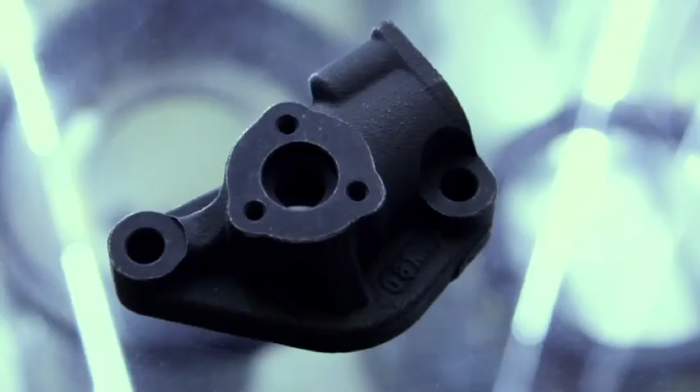It employs 250 skilled workers, some of whom hold a share in the company, working on a common basis of experience and professional competence. The workplace has grown to reach the current facility total of 34,000 square meters. It has state-of-the-art production equipment which allows us to meet our customers' requirements.

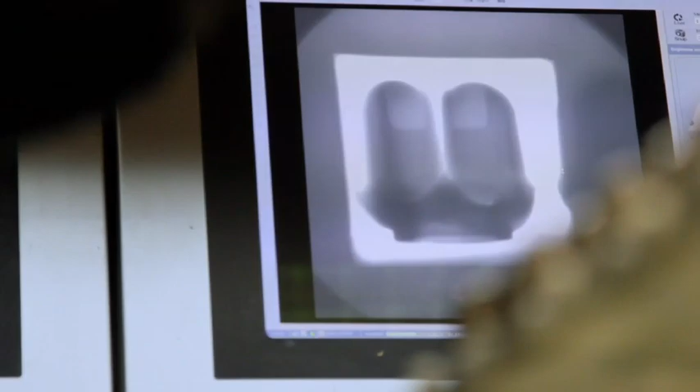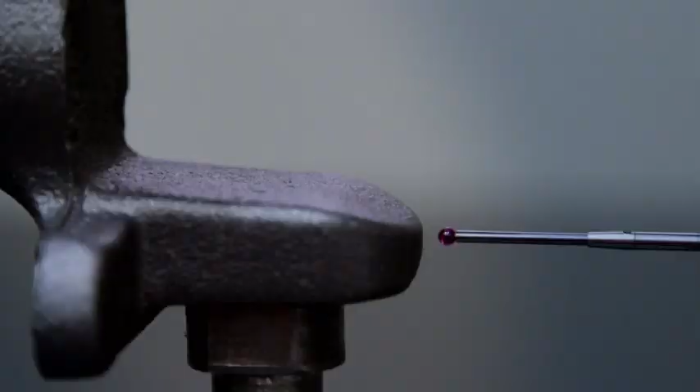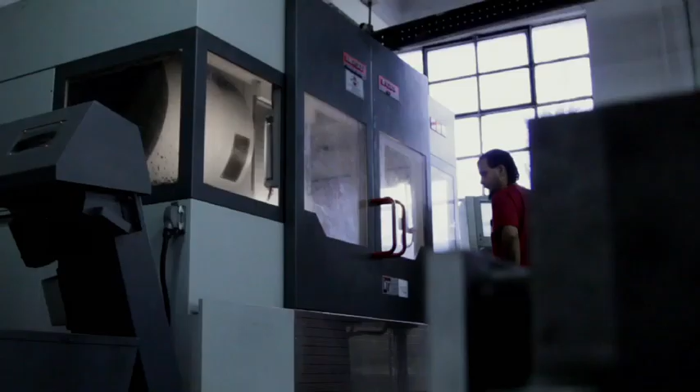Betsaide's management strategy could not be clearer. Customer satisfaction, quality, competitiveness, observance of the European EFQM model, and continuous improvement. A competitive market like the one we are in also calls for flexibility, adaptability, and diversification. This is the path marked.

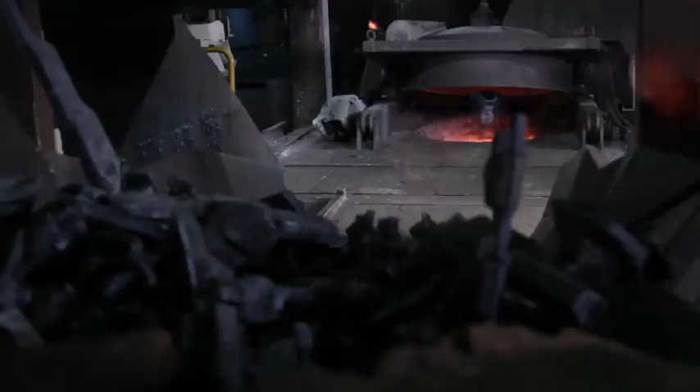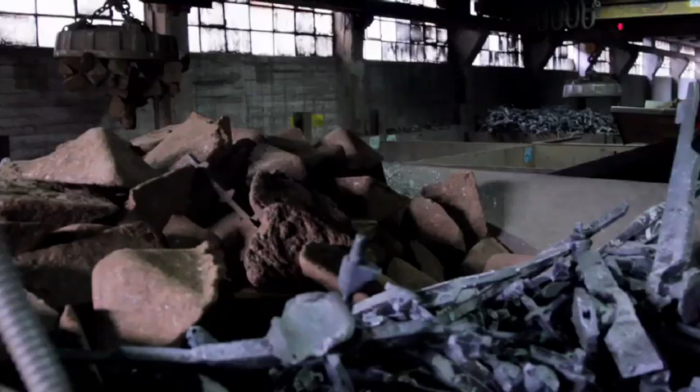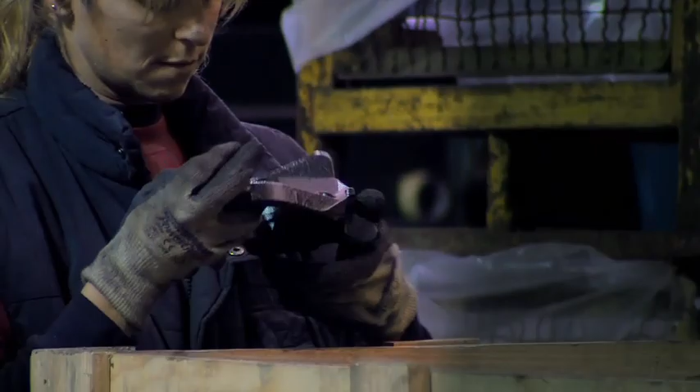Betsaide is an innovative company that produces three types of cast iron: ductile cast iron or nodular iron, grey iron, and austempered ductile iron, ADI. Parts weighing from 200 grams to 20 kilograms are manufactured in medium length and long series. We are also able to offer additional services such as thermal treatment, precision machining, and coating.

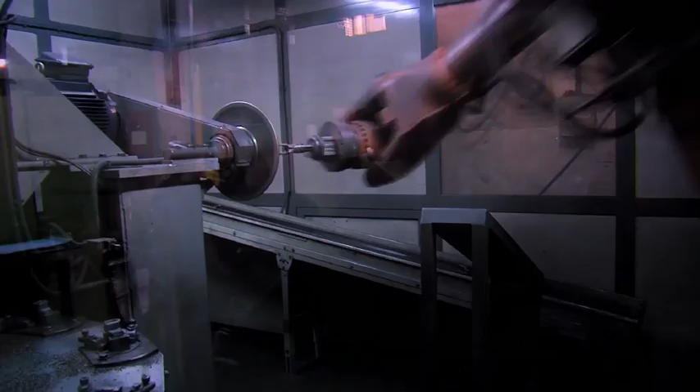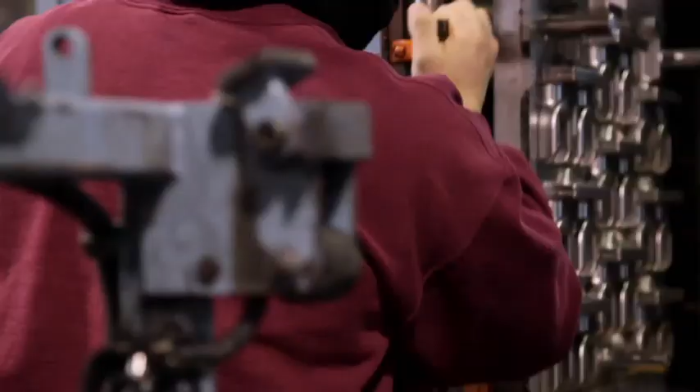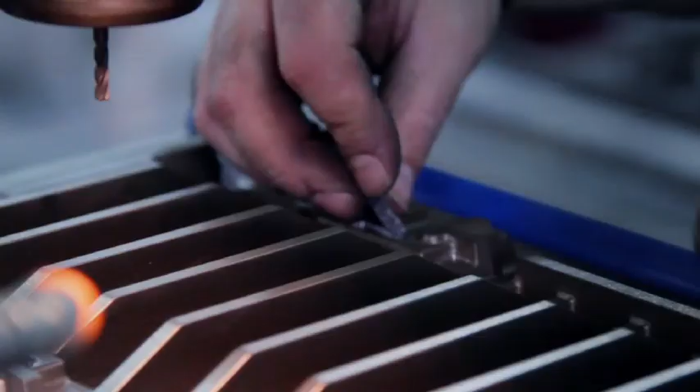Behind ideas, there are always technological resources. Betsaide works on an advanced co-engineering basis with its customers to come up with perfect solutions. Fast, in-house prototype production is completed with a thorough control and testing system to check all the company's production. The latest nodularization and molding equipment is used for this purpose. The company also works in research, development and innovation projects alongside important technology centers.

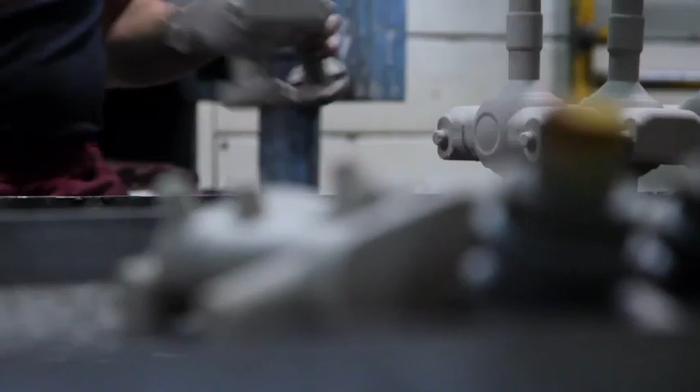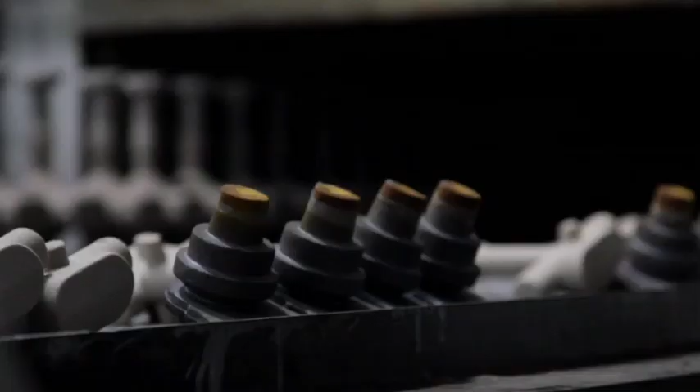The production process at Betsaide gets underway with a customer order for a part or reference. First of all, the core is made in the core section using fast, state-of-the-art Loramendi core-making machines. The core is then painted and oven-dried before being packed with great care in a box for transportation to the Disamatic machine.

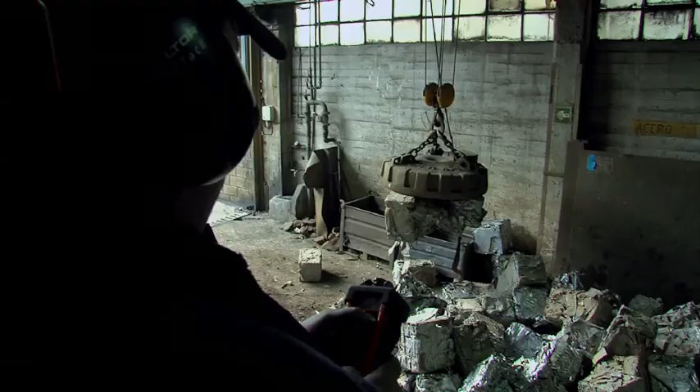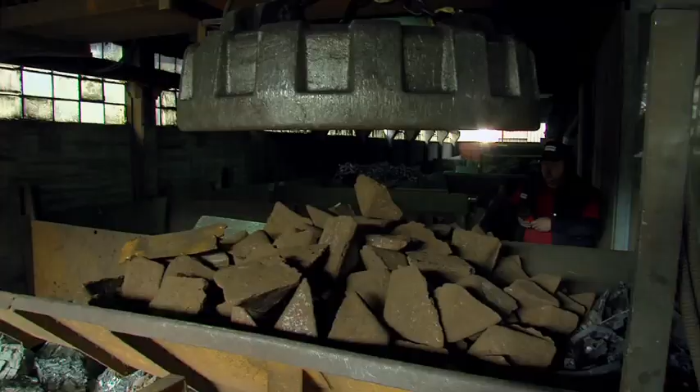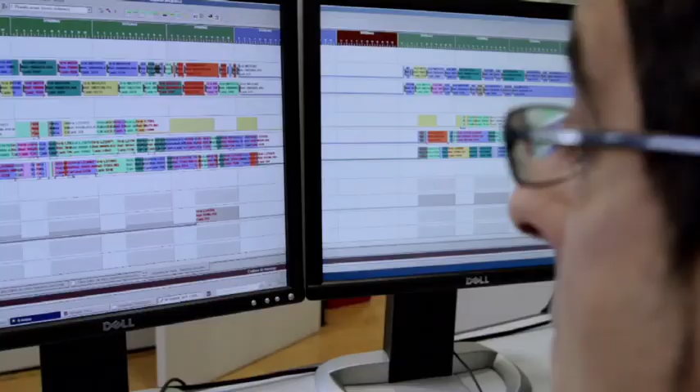Three types of raw material for production are then bought: reception and weighing of iron ingots, packed scrap cast steel, and thirdly, reception of ferroalloys, such as spools of magnesium wire, copper, ferrosilicon, etc., to adjust chemical compositions. Then, and depending on the daily production plan, the furnaces are fed the three materials: iron ingots, steel, and the return from the part feed channels.

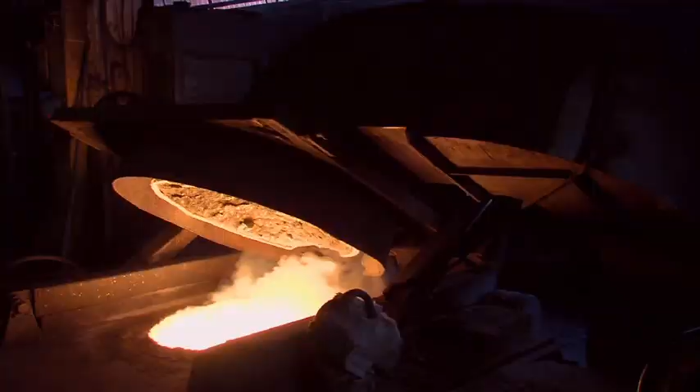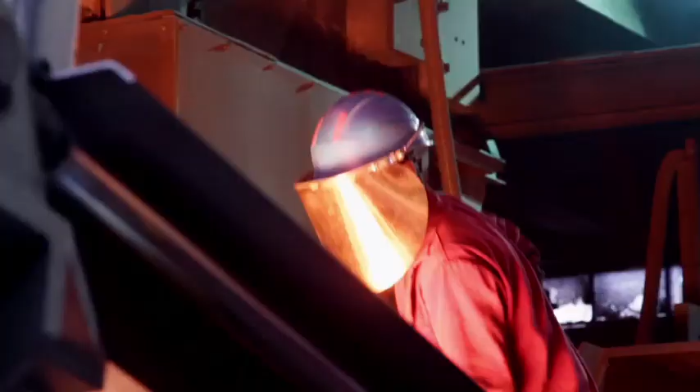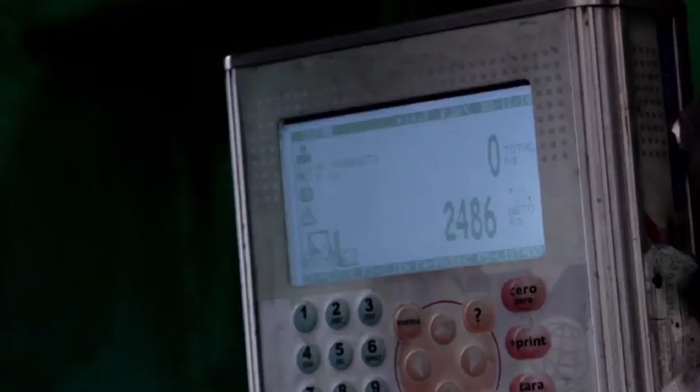These are then melted at 1500 degrees C in our 6 ABB induction furnaces to make one of Betsaide's materials: ferritic ductile iron, pearlitic ductile iron, or grey iron. The relevant chemical analyses are also performed in the furnaces prior to tapping. Finally, 2,500 kilograms of molten iron are transported to the automatic casting section by forklift, magnesium treatment being performed along the way.

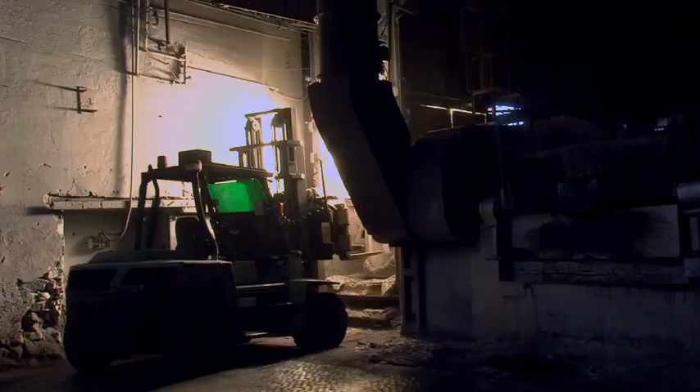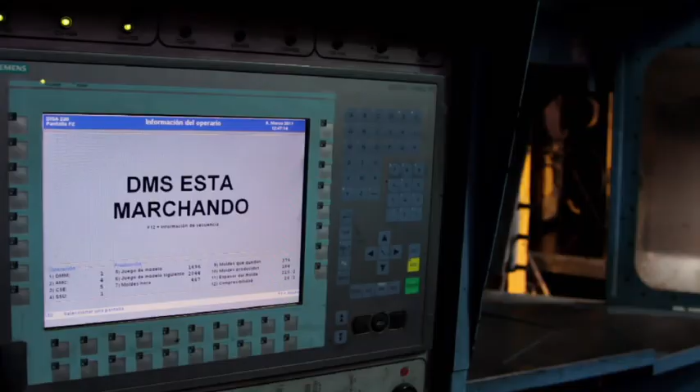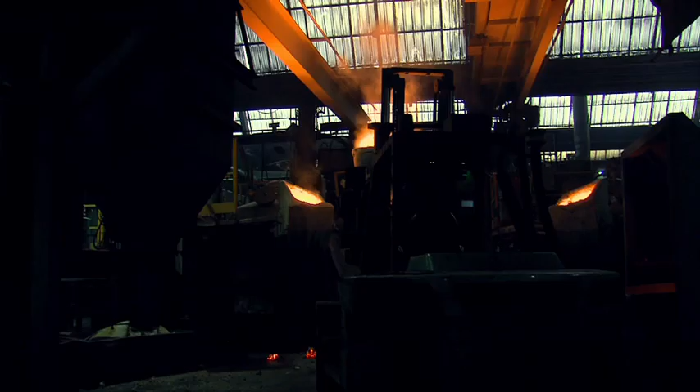The pattern tool or plate that lends the sand the shape of the part is fitted on the Disamatic vertical molding machine, and cores are added if necessary. The chemical composition, including magnesium, is controlled in the automatic casting holding furnace. The molds are filled at 1400 degrees C and the metal is poured in. As part of this operation, the nodularity of each tap from the furnaces is automatically controlled at the last moment, i.e., when the magnesium is at its lowest.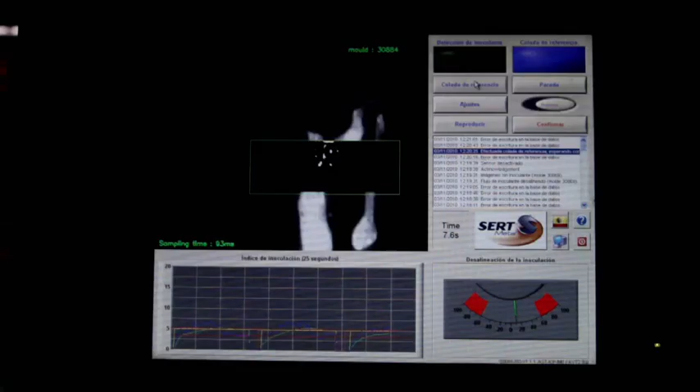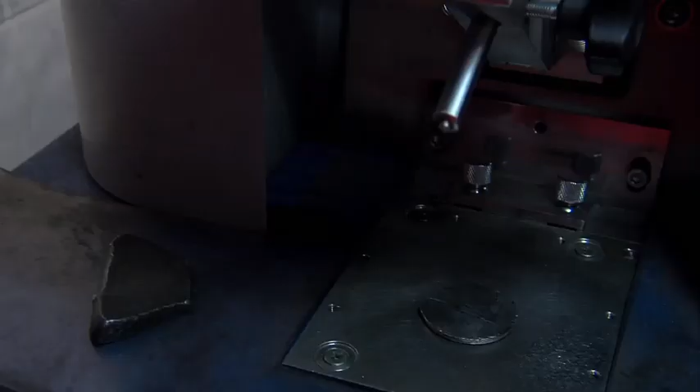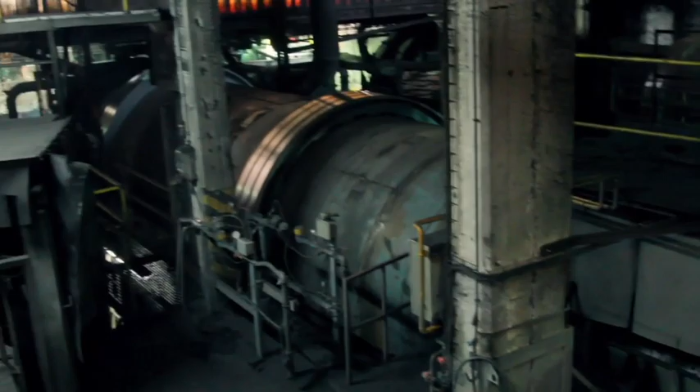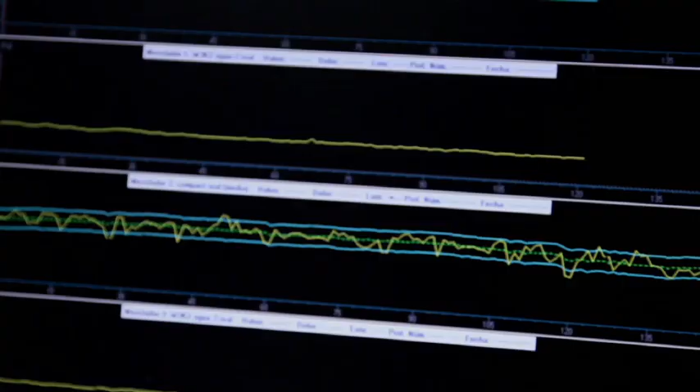The batches of parts cool down on a 45-meter-long automatic transporter for an hour and a half or 2 hours and then fall into the demolding drum, in which the parts are separated from the sand, which returns to the sand shop closed circuit. Betsaide has modern sand production and preparation equipment for continuous use, which includes 2 Eirich sand mixers, a sand cooler, an automatic quality control system, and a sand laboratory.

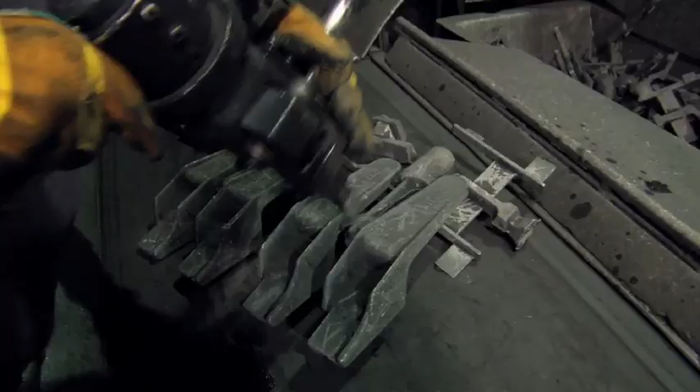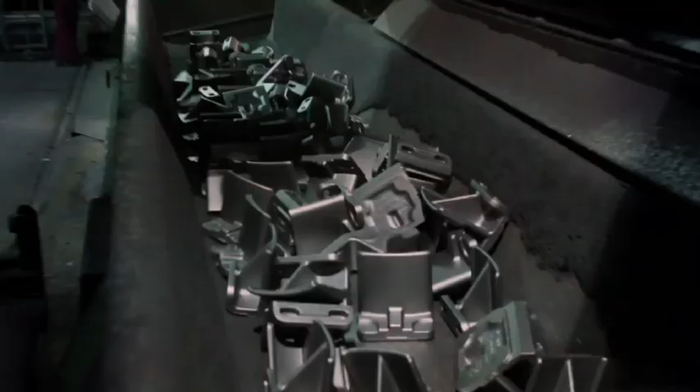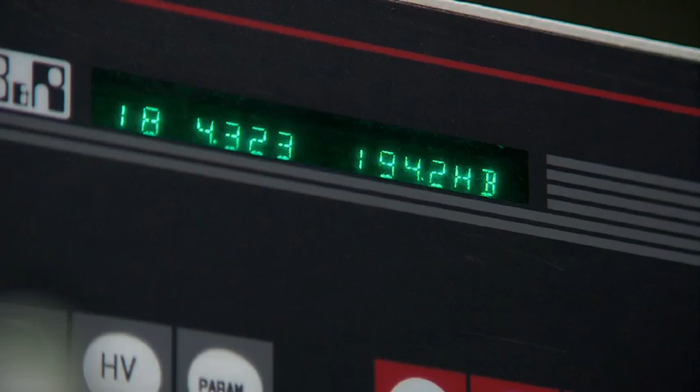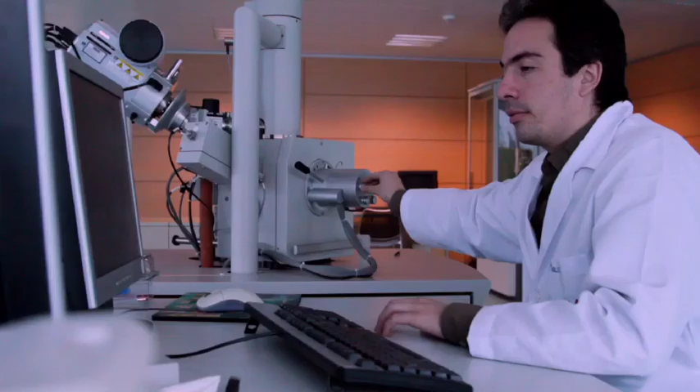The tests performed at Betsaide using emission spectrometers, ultrasound, durometers and optical microscopes are complemented with extra tests performed at the Azterlan Technology Center in Durango. The company also works in research, development and innovation projects alongside important technology centers.

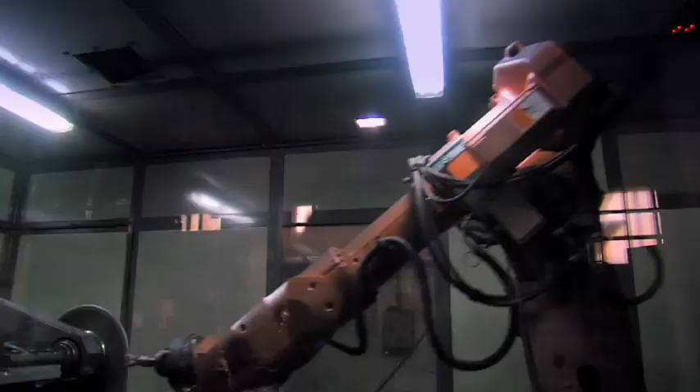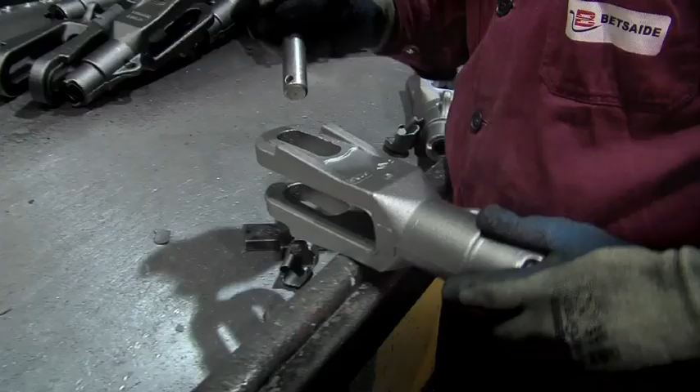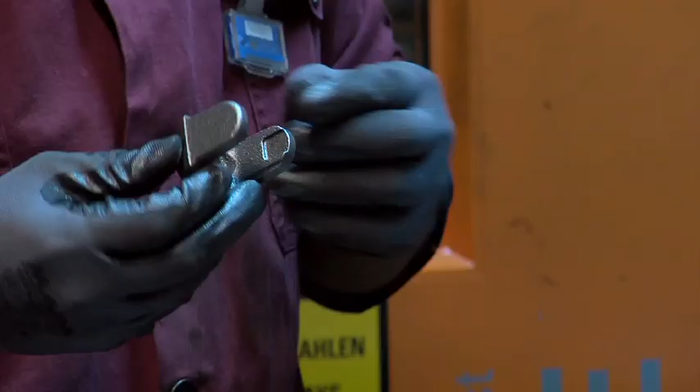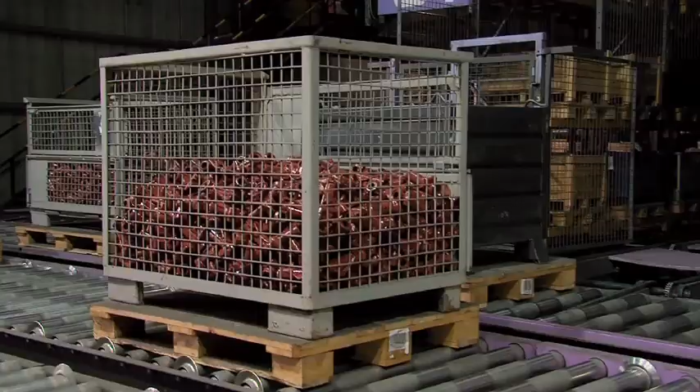Later, the parts are deburred in automatic machines and then checked visually one by one. But that is not the end of the inspection process because, if necessary, Betsaide has 2 X-ray machines to ensure that the parts do not suffer from interior shrinkage due to contraction of the metal. Finally, the parts are counted, packed and stored in the automatic warehouse for later dispatch for other complementary operations, machining, thermal treatment, painting, or direct delivery to the customer.

Betsaide is firmly committed to the environment, integrating reuse, recovery and clean production throughout every stage of the process. It has integrated environmental authorization and actively participates in new forms of environmental management promoted by public and private bodies.

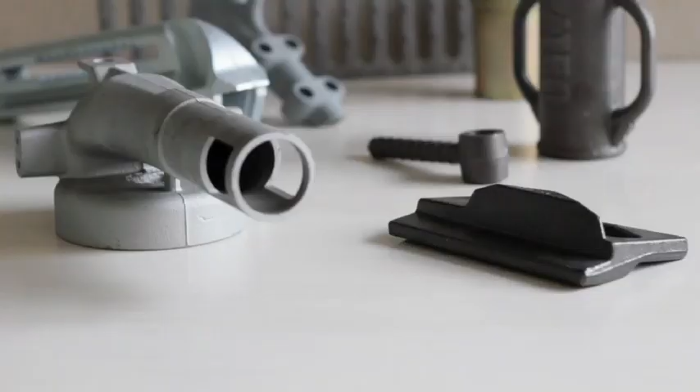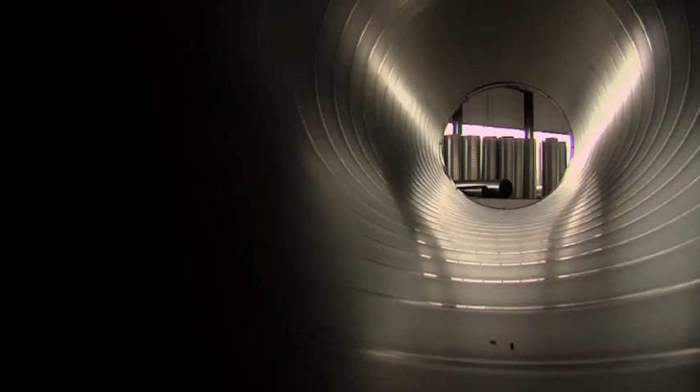Betsaide has doubled its turnover over the last 10 years, exceeding 50 million euros at the end of the decade. Betsaide has 20 ongoing customers and 1,000 active references. More than 50% of production is for the automobile sector. The rest is shared by the water and gas sector and other sectors such as building, agricultural machinery, lifting equipment and transport, hand tools and household appliances.

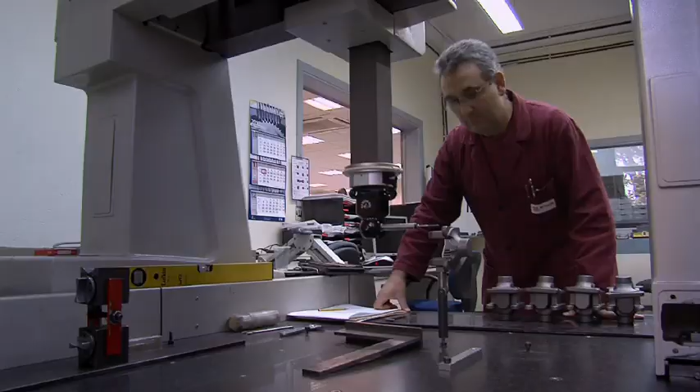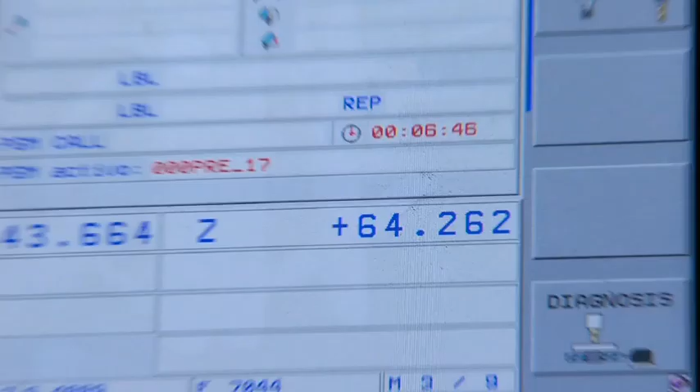Over recent years, the company has invested more than 25 million euros in order to equip itself with the latest systems and installations in the sector. And we are going to carry on like this, placing our trust and investing in the future with determination. Approximately half the company's production is exported to Europe, mainly Germany, France, Italy and the United Kingdom, and in practically every case to leading manufacturers in the automobile and valve sectors.

Every single stage in the production process is key to understanding why Betsaide is a company with a great future ahead of it. Iron gives it strength and forges its firm commitment to its customers. Betsaide.